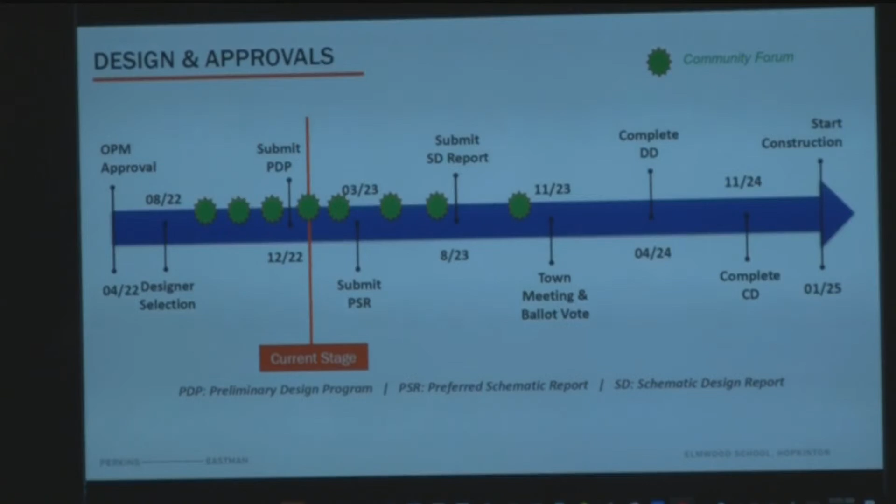So with that, I'm going to turn it over to Dan to talk a little bit about site selection and where we were through the fall.

At the beginning of the process, we looked at all the available potential properties throughout the entire community that could fit the building and fit the program. We knew the acreage number and size of property we were targeting, and we found about 44 or so sites that could potentially support a school of this size. Once we did that, we looked at a first round of how we might cull those sites down, and the biggest factors were the environmental constraints that might be found on the site—wetlands and other things that might make the site unusable—and that brought us down to about 12, and ultimately down to these that are here now.

So we started with 44, and through that first process brought it back down to about 12, then narrowed it even closer into the 5 that we studied through the PDP process, to get to the 2 we're on now: the existing Elm Street site where the school is, and the Hayden Rowe site next to the Marathon School. We also looked at a site on East Main Street, Pleasant Street, and another variation of the Marathon site.

So the preliminary design program, noted earlier, is really a recap of what we've done to date—from the fall until now—which is the ed programming summary, existing conditions, site development, and evaluation criteria. We also listed the meetings that have occurred in public, through the school committee, school building committee, and other forums, and packaged all that up to the state to submit. They've reviewed and responded with some comments, which we'll be reviewing with the building committee at their meeting next Tuesday. Then we're on to the next phase, which is drilling down on the options.

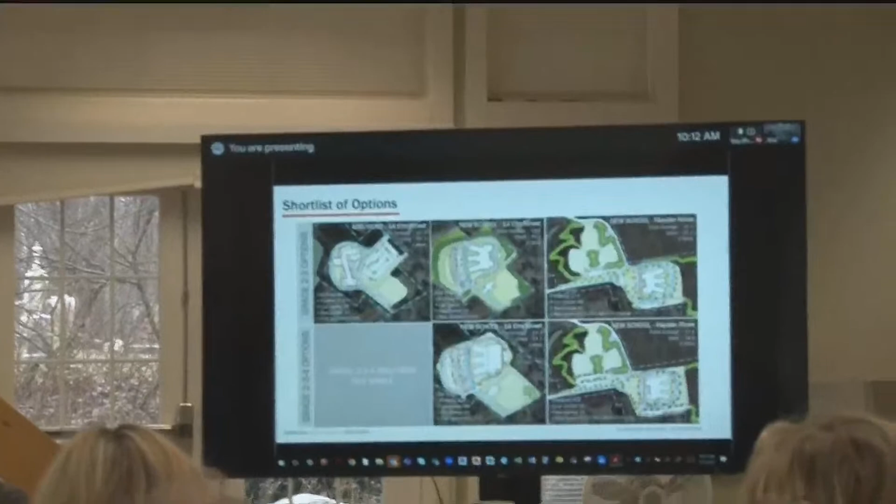What you see on the screen here is the 5 options submitted in that report. The state requires us to do 2 things. One is a code upgrade: what is the residual value of your asset? You have an existing building—what does it take to get that up to code, even if it doesn't meet the needs of the students in terms of overall size? That part isn't on the screen, but it's always there as a baseline—what does it cost just to upgrade the building alone?

What we are required to look at is an addition renovation—that's the leftmost image here, where we show in dashed red the outline of the original building, which may be hard to read at this scale, and then where we would add additions, bolting on to the end of the building, both at the upper or northern portion of the graph here, and at the northwest corner.

We also look at new construction options. In this case, we carried 2 forward: both the Elmwood site and the combined Hayden Rowe, which includes what was previously known as the Tadaro or Irvine parcels, also known as Marathon.

So it spans over 2 parcels owned by the town, and we've looked at variations that you'll see in the coming slides. The important thing to note is that there's 2 grade configurations. The MSBA is allowing us to study both the existing grade, which is 2-3, the current enrollment for Elmwood, and a 2-3-4. There's a large growth in the overall student population affecting every school in the district, so there's an ability for the town to choose an option with 1 extra grade that helps solve one additional layer of complexity the town needs to solve in coming years.

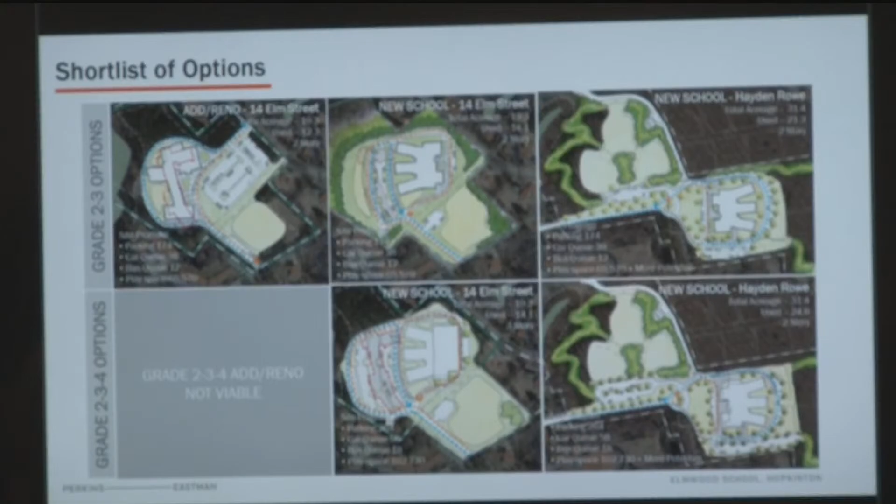That grade configuration is a decision by the school committee, and I don't want to lose sight that we're working for the school building committee. There's a parallel track going on this month with the school committee where they're evaluating not only the needs of the Elmwood project, but the overall needs of all schools in town, to understand where they would best focus their efforts on addition renovations or new building construction to handle the growing population.

So I'll take us in for a closer look at what the plan options are right now. I'll start by saying this is really feasibility level, meaning they're not fully vetted designs. We're still working on refinements, including the circulation and the exact positioning of the buildings. But this first round shows the size, kind of impact, and the scope of the program on the site.

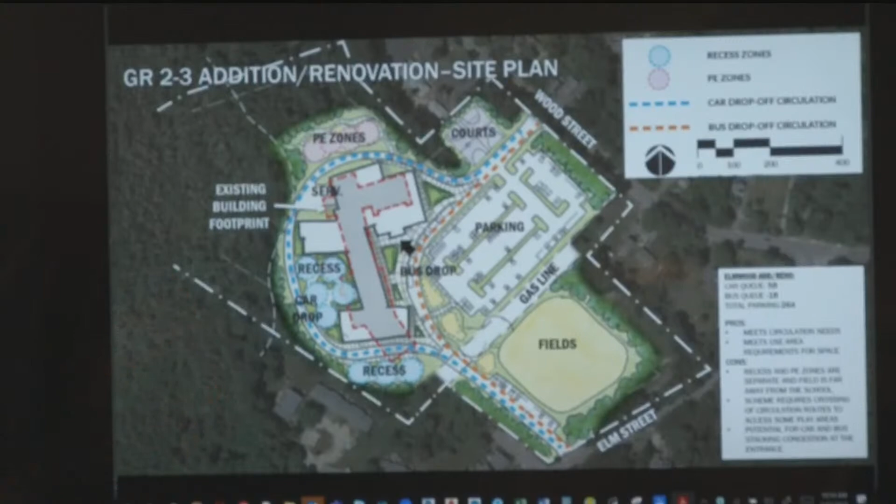So what we're looking at here is the Elm Street site. The existing Elmwood School is shown in the red dotted outline with the colored hatched area. This is an add-reno, so we're showing an overlay of that existing building, and what's white here are new additions. In some cases, the new addition is built over existing, so we'd have demolition of portions of the existing building, then new construction added. In this case, we're trying to reuse as much of the building as we can - about 2/3 of it. We're rebuilding brand new classrooms, which are the two white angled wings.

In this option, we're taking the existing gymnasium and repurposing it as a cafeteria. It's a little too small to be the future gymnasium because of the number of students that will be enrolled in the school and the amount of time they spend in physical education - they just can't do it in a single gym space. So we'd be building a brand new gymnasium and repurposing the old one for a cafeteria.

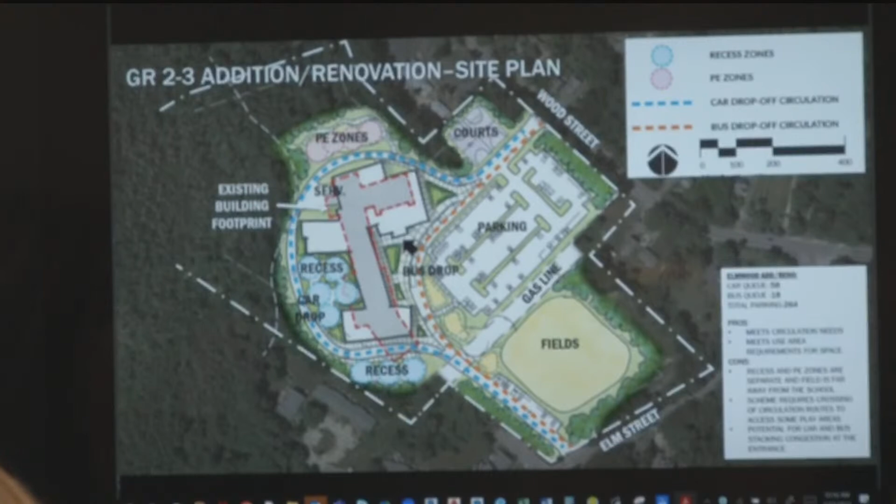You can see on the site a couple of things. First, to build new construction with the existing school, it'll be quite disruptive. We'd always do our best to separate where students are versus where the contractor is, but it's very close proximity. The school would be in operation while the contractor has their zone to build new construction. Doing a project this way, where teaching and learning is still happening while we're building and renovating, tends to stretch the schedule and take longer. Since this is just a 2-grade school, that would be the entire experience for a whole cohort of students at that school - their entire time there would be through construction.

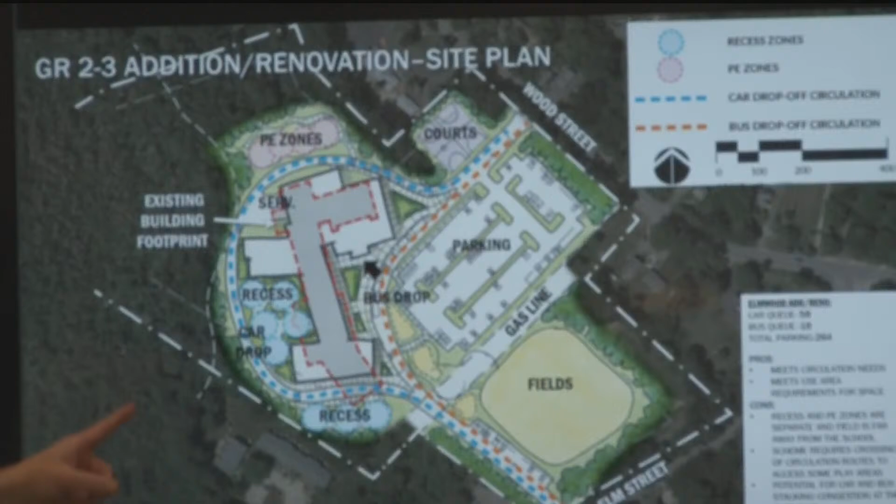So some challenges with this. What we see here on the existing site - the dotted line represents the property, fading off to the side here. We have the fields shown in green, where the current fields are right now. You can see the high pressure gas line that runs through the site, which creates an additional challenge because we can only put a building on one side or the other - we can't put it over the gas line, so it becomes a bit of a cramped site.

The parking is expanded, and that's currently where there's a knoll of trees and woodlands, so we'd have to clear that. In all cases, we try to keep as much traffic off the streets as possible. We'd continue using Elm Street as the primary entrance and exit, but it's wise to have a second means, even if for emergency or additional relief, so there would be a connection to Wood Street. I believe there's already a small connection there, but it's not paved as an actual roadway.

This doesn't show the progress of separating cars and buses, but for safety it's really important that we separate them, get them off the street, but create safe pathways for students to walk and enter into the building.

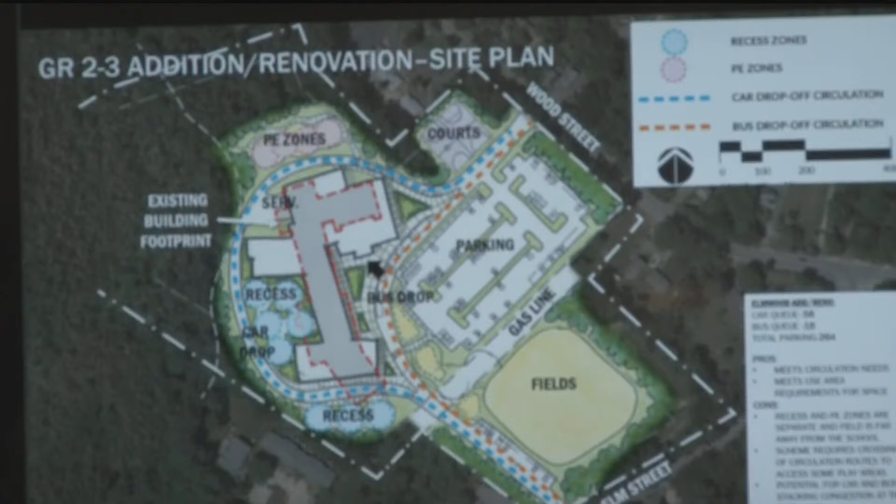The next option also on Elm Street would be a brand new school. We've already refined this one so it's not as spread out, but here you can see again the dotted line for the existing Elmwood. The intent is to build an entire school without touching the existing building, so it can keep functioning. But even though the new construction is separate, in such close proximity to the existing building it will be disruptive, interrupting circulation on site and students' access to parking.

For the contractor to build a new building, in this shape or any shape, they would need their own parking and lay-down space for materials, so it is quite a compromise for the functioning inside and out of the existing school.

What we can see here is the majority of the parking located where the fields are now. The new building, as I mentioned, comes very close to the existing one in this diagram. We've since refined this to pull the wings back.

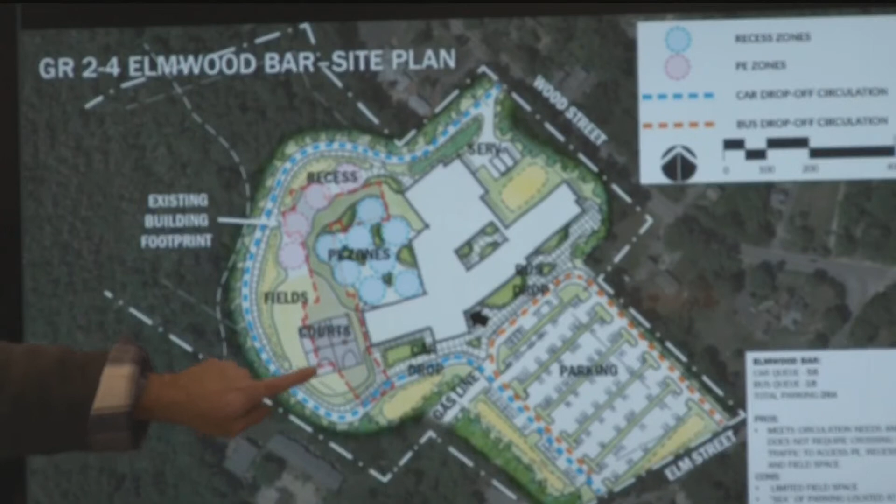After the new building is built, the existing building would be demolished, and then we can see zones for recess and physical education, play areas that would be in the back of the site where the existing building is now. Same circulation—primarily coming in off Elm Street, but with that secondary access to Wood Street, pulling as many cars off as we can.

The perimeter road around the site does a number of things. It allows us to pull more cars off the street, but it also becomes an emergency access around the building for fire safety.

I think we'll continue to refine this. You can see the gas line again runs through the middle of the site. We'll probably have to adjust the parking to make sure there are no stationary vehicles over that gas line, just roadways—so still being refined.

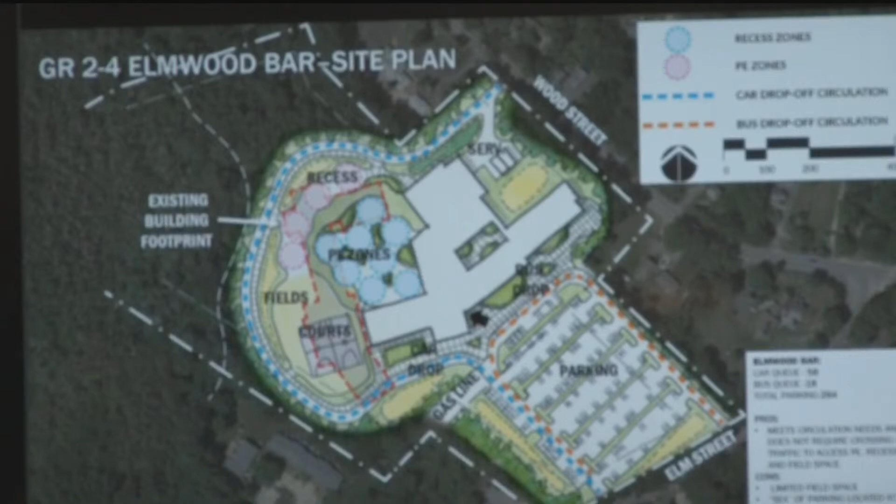A final option on Elm Street was to look at the possibility, if it's so disruptive, of just building the ideal school, demolishing the existing school, and building a brand new one—but that would mean the students would need someplace else to go, and there isn't currently swing space that can accommodate them.

There are options, or the potential, to do modular classrooms and stage them somewhere to create the needed space for the school, but that would come at a high price tag, because it's extra money that wouldn't go into bricks and mortar for the building, and the state doesn't reimburse on that. Regardless, we wanted to turn over every stone and look at every option. This shows a building that fits a little more comfortably on the site because it's built over the existing building, but in the end, probably not viable.

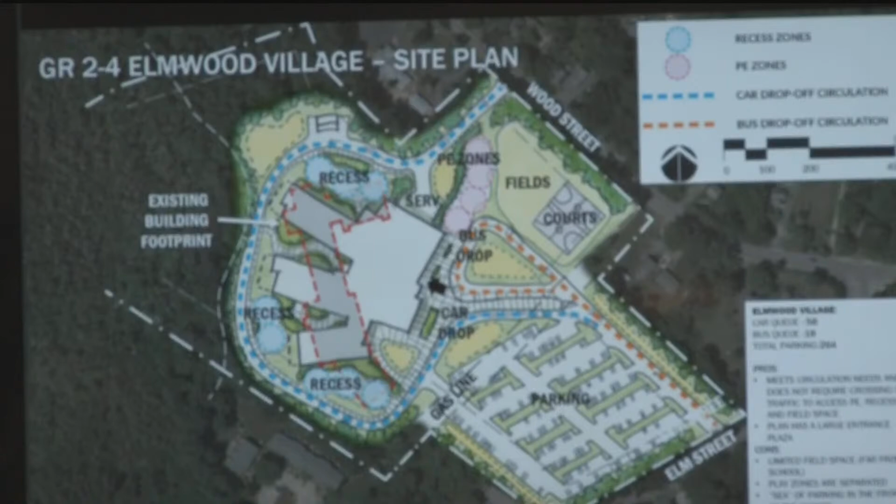If I move over to the Hayden Rowe site, just north of the screen here would be the Marathon School. So we're building between the Marathon School and the extended parcels here. We're showing one location for a potential new facility. In this case, the site continues further to the east. We're trying to keep the building a little closer to Hayden Rowe, so we're not extending utilities or doing too much building and construction deep into the site.

You can see the outline of the site creates a little bit of a pinch point, so even though there's a tremendous amount of land here, it is a little pinched in that location. This locates the building just after that pinch and keeps all the parking and the majority of the circulation out in front of the school. There would be the ability to build fields behind the school and also between the Marathon and the new facility—not that all those fields would need to be built, it's just showing the potential.

So here we've got separation of buses and cars, very similar. In this diagram, it shows an entrance and exit off of Hayden Rowe, but what we've learned through our traffic studies is that the best solution would really be to treat this like a campus, so to connect the inlet with the current Marathon inlet and have a campus road inside this site that connects both Marathon and this new Elmwood facility. That would allow us to get pretty much all the cars and buses off the street, not backed up onto Hayden Rowe.

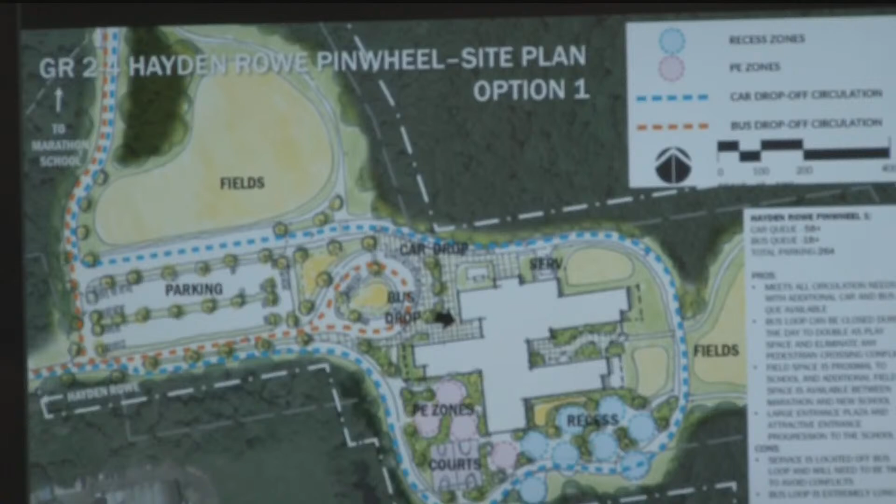So this is one location. An additional location would be just up from that pinch point that I showed you earlier. Similar shape to the building. Again, it would want to have the same campus connection from Marathon School into the site. Here you can see the fields and the physical education, the recess areas are really close to the building, so this is a little bit more of a compact location, but plenty of room to spread out. I think the fields down in the lower right are really optional, not necessary as part of the project. But otherwise you can see what that would take shape.

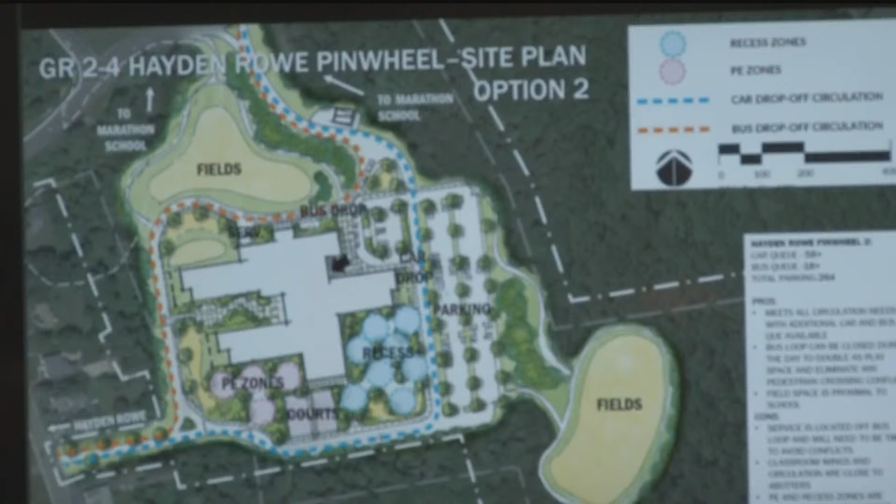And then we looked at, back to the original location, different shapes and ways to organize the building. Here the site is large enough so the building really isn't forced into some funny geometry, so this is just a different version of the plan. It has 3 wings. Again, for each one of these, what we're actually showing is the larger school, so it would be the grade 2, 3, 4. It would be 3 stories. If it were only the grade 2, 4, it would be 2 stories.

And that's kind of our first round of study on these. They could, if it's a grade 2, 4, it could also be 3 stories and be an even smaller footprint, something that we can refine and develop. One of the notes there, at the end of each wing you'll see a little dashed black line, and that's room for expansion. The MSBA requires all towns to go and identify an area for expansion. Certainly this town has had the need to do that with Marathon, and so we would repeat the same process here to make sure there's a space set aside free of utilities or other encumbrances that will allow for an addition in the future should it be needed.

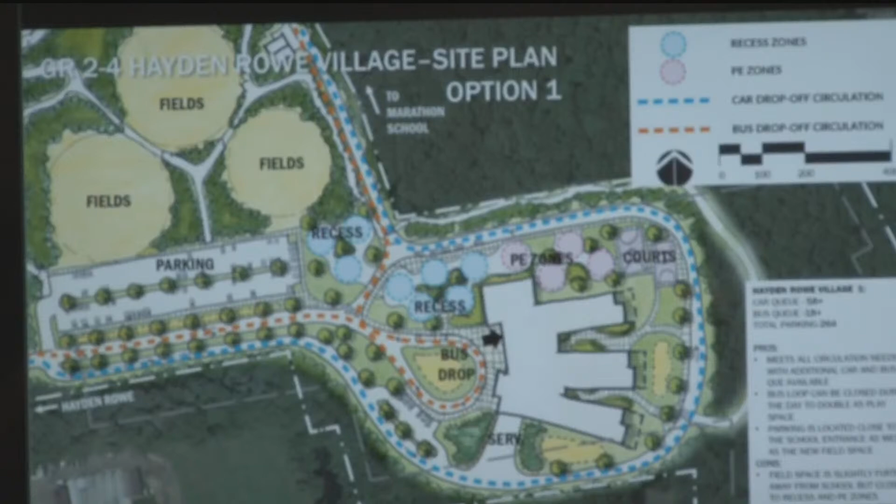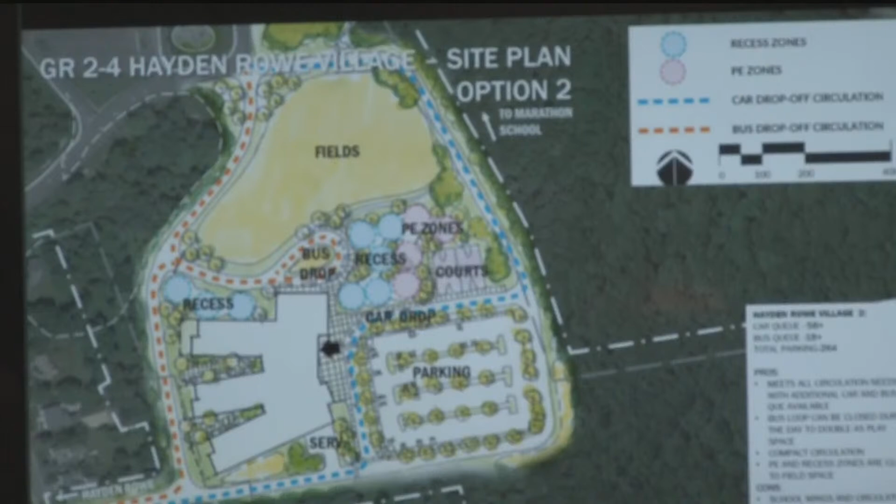And the last option is similar, again a different floor plan located now just basically northwest of that pinch point, so it's a little bit more consolidated. We can see the consolidated parking, consolidated fields, recess, and PE zones. I don't think there's much else to say on the site.

So as we take the next step, the evaluation criteria for these options includes the number of options you've seen here. It's actually twice as many options because for each one it's a grade 2, 3 or a 2, 3, 4. And I'll let Jeff walk through the evaluation criteria.

First and foremost, does it meet the educational needs that the school department has developed? Cost, and at this point we're comparing relative costs of the options. We're under extreme escalation issues over the past couple of years, which all of us are used to with the costs we're seeing every day at the grocery store and beyond. So we're doing the relative cost comparison of the options.

We'll also look at schedule duration. As Bob talked about with some of the ad renos or the options at Elmwood, you'll end up with a longer duration just because of the demolition and working around the existing building. We'll also look at disruptions to the education during construction, or loss of fields. Sustainability is an important topic, making sure we're building green.

We've had a few forums on that with the various groups in town, both at their venues as well as the community forums. Net zero achievable.